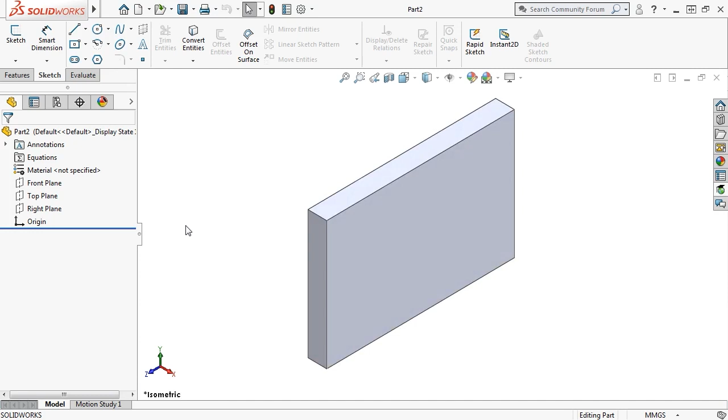For this example, I'll be sketching a wide rectangle on the top plane and extruding it up to give it some thickness. I don't necessarily have to sketch this rectangle on the top plane, however. I could sketch it on the front, top, or right reference planes, but you have to decide if you want the final part to look like this, or like this.

If we want the part to look like this, we'll begin this rectangular sketch on the top plane. To begin the sketch, I'll click on the top plane and select the sketch icon from the pop-up menu. When I do, the graphics area rotates onto a normal perspective, so I'm looking directly onto the top plane, and we can begin sketching.

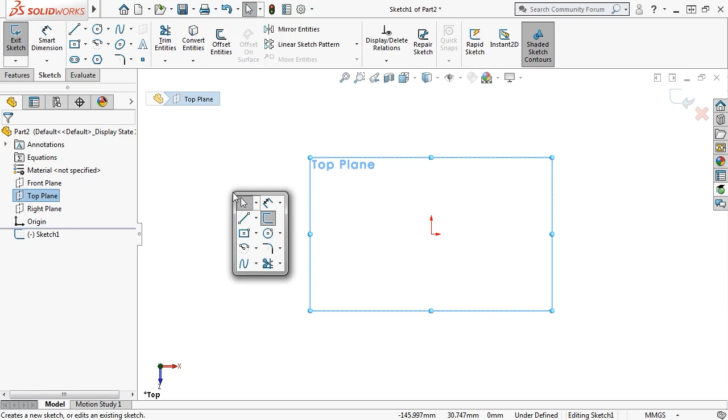I'll first launch the Rectangle tool from the shortcut toolbar by pressing the S key on the keyboard. For this design, I'd like the reference planes to pass directly through the center of the part, so I'll be using the Center Rectangle tool. I'll show you a little later how keeping the reference planes in the center of the part will help with some aspects of symmetry, and later, assembling other components once we begin talking about assemblies.

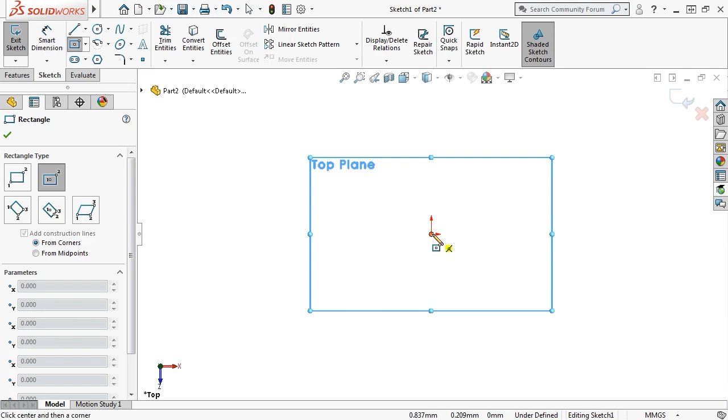When I begin the center rectangle, I'll make sure the yellow flag appears next to my pointer, indicating that a geometric relation will be added on the origin for the center point of the rectangle. I'll click to begin, click again to give the rectangle a size, and press Escape on my keyboard to deactivate the Rectangle tool. At this point, since the size of the rectangle is underdefined, we'll add a couple dimensions.

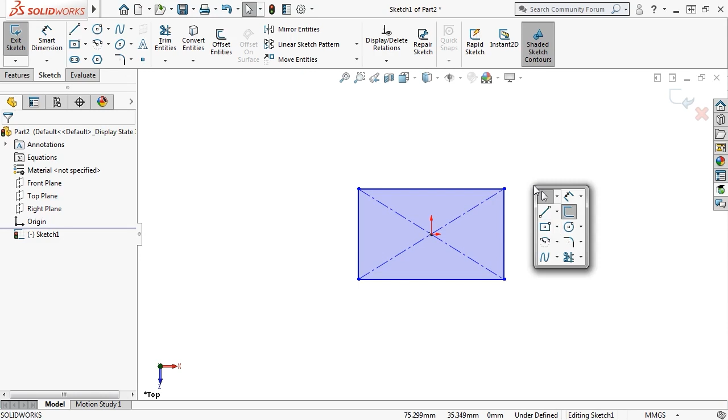I'll activate the Smart Dimension tool from the shortcut toolbar by again pressing the S key on the keyboard. I'll start with the length dimension by clicking on it, click again to position the dimension in the graphics area and type in 150 millimeters. I'll click the green check, and the dimension is added.

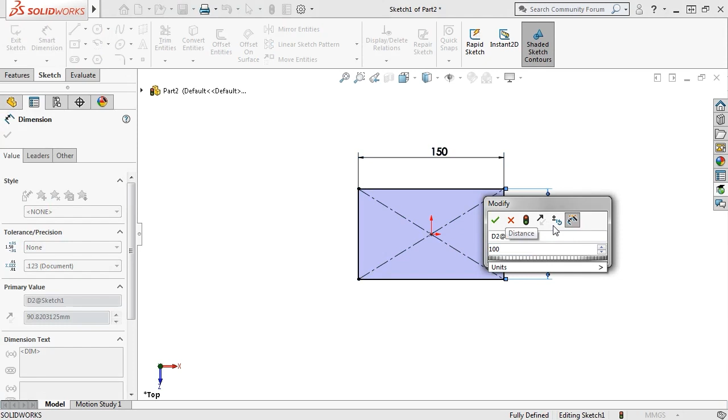For the width dimension, I'll click on this line here, click again to position the dimension, type in 100 millimeters, and click the green check. At this point, the status bar tells us that the sketch is fully defined and all the geometry turns black to indicate this as well.

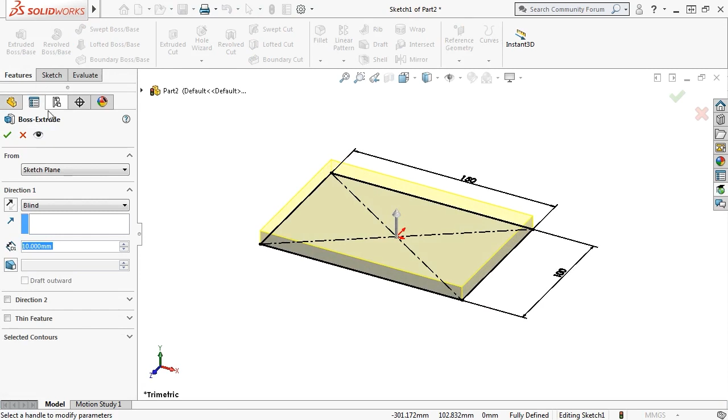Next, I'll launch the Boss Extrude tool by switching over to the Features tab in the Command Manager and select the Extruded Boss Base tool. Here, I'll be using a blind extrude, so that the thickness of the rectangle will be going above the top plane.

I'll type in 15 millimeters for the depth, and press Enter once on the keyboard to update the preview. The preview looks the way I want it to, so I'll click the green check to finish the feature.